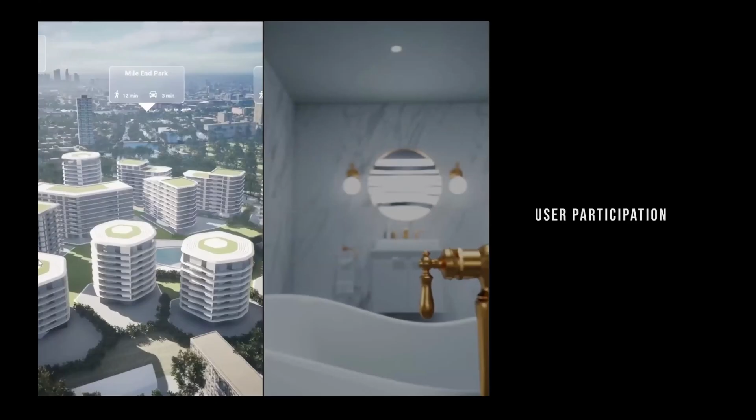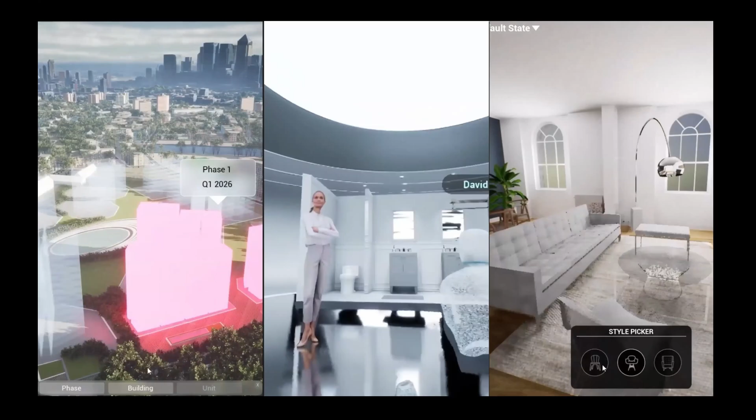At Aalter, we sit at the intersection between automated design solutions, leveraging a lot of our generative design tools, with enhanced experiences in the form of game engines and user participation through online configurators. For us, the way that we study and explore design options is very important, and the more data that we have, even if it's visual, being part of that process is important. So our mission is to deliver mass customized spaces that are more sustainable and inspiring through intelligent design technology.

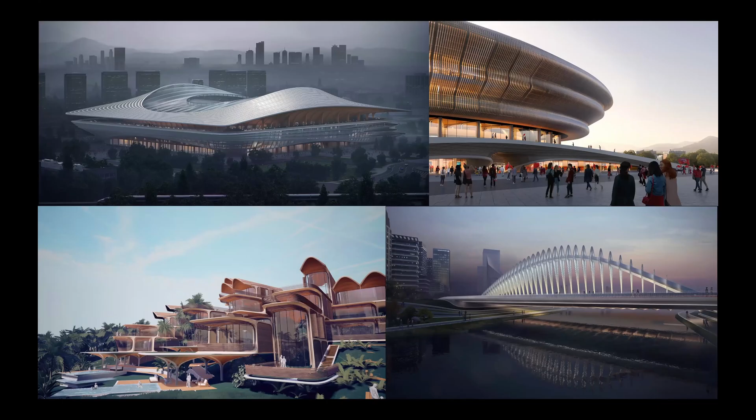It's also important to mention some of our past experience. Some of our team members were from ZHA, the computational design group. At the time we created a lot of custom software to win competitions at scale very fast, but also to rationalize complex geometry and create immersive, unique experiences in the form of configurators.

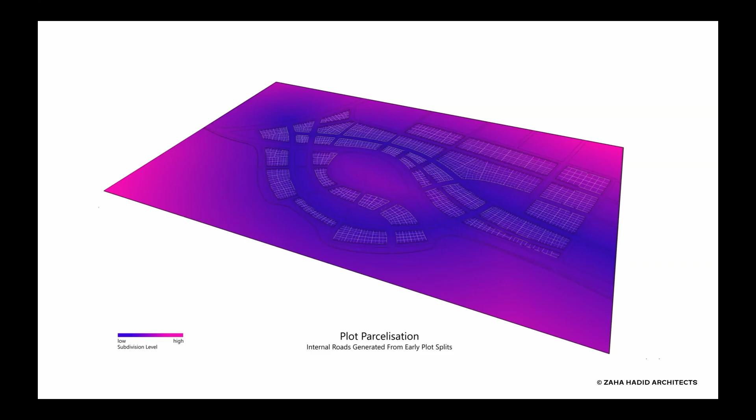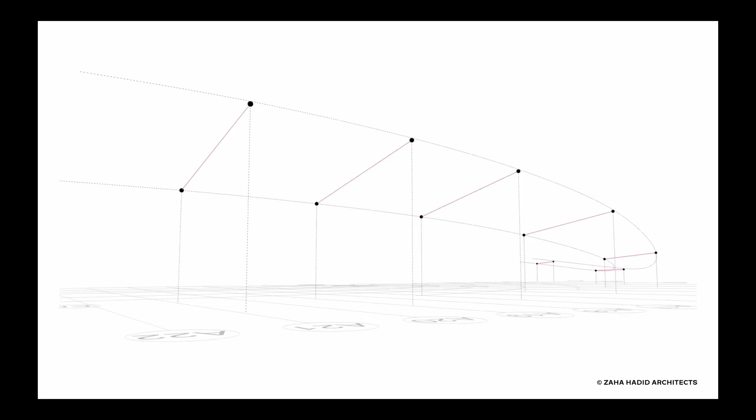We leveraged these tools across different scales: master planning tools with real-time analysis, rationalizing building typologies, and rationalizing complex systems, cladding and geometry, so we could build from the most standard parts and minimize the budget, while also creating configurators.

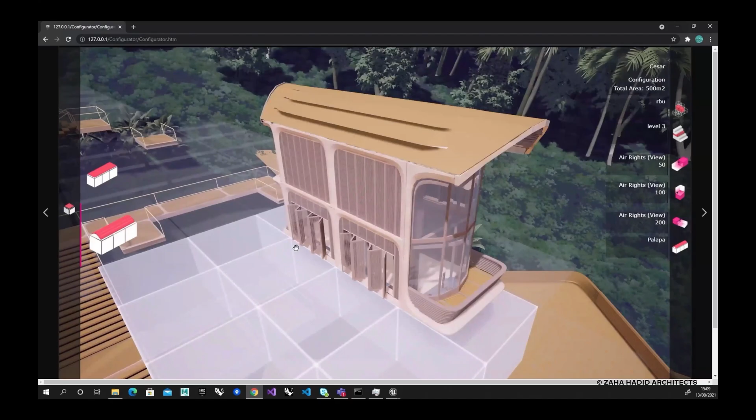This was one project from six years ago. It was quite innovative at the time, using modular systems and timber frames to deliver a unique experience for an island in Roatan. It's also important to mention some of the precedents about encoding architecture.

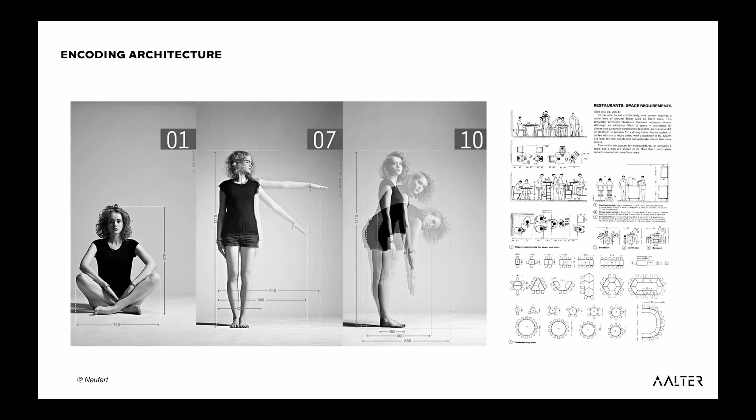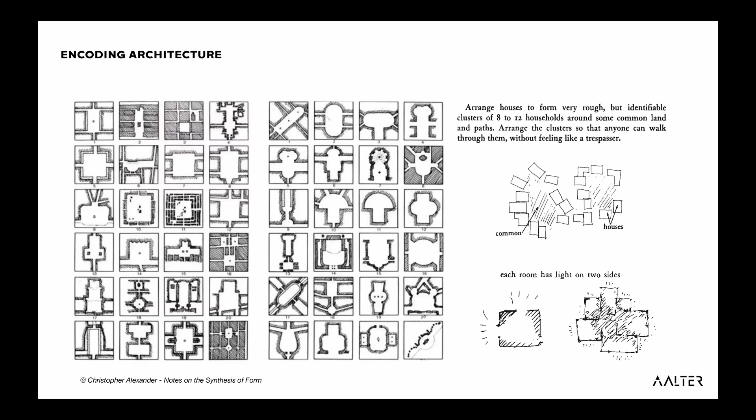We stand on the shoulders of giants here. The idea of encoding architecture is not new. Throughout history, architects have tried to encode rules based on ergonomics, room functions, and space layout, the relationships between spaces and between spaces and the exterior, setting rules and encoding and trying to serialize a building out of data, basically as graph relationships.

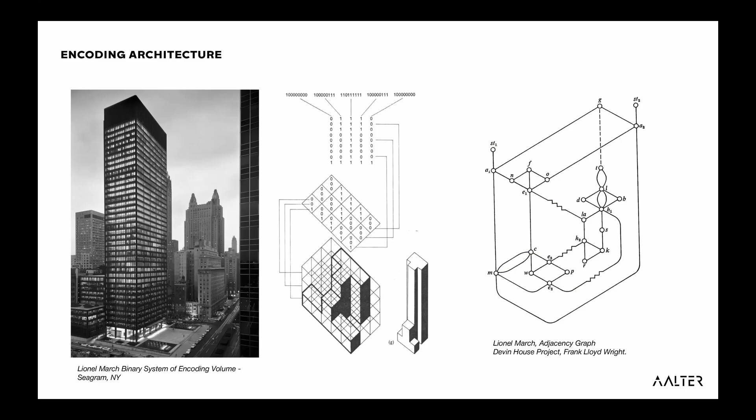This kind of set the stage for founding Aalter. Our technology is quite simple on its own. It's basically a system, a set of relationships similar to what would be an IFC or a BIM model nowadays, but with encoded intelligence of relationships between the parts.

Every room is aware of where it's connected, to which walls, to which window, which door, and these relationships extrapolate across multiple scales. We can understand how the circulation relates to each of these units, to understand escape distances, different typologies, and at the end of the day these become knowledge graphs, which LLMs are really good at querying and manipulating.

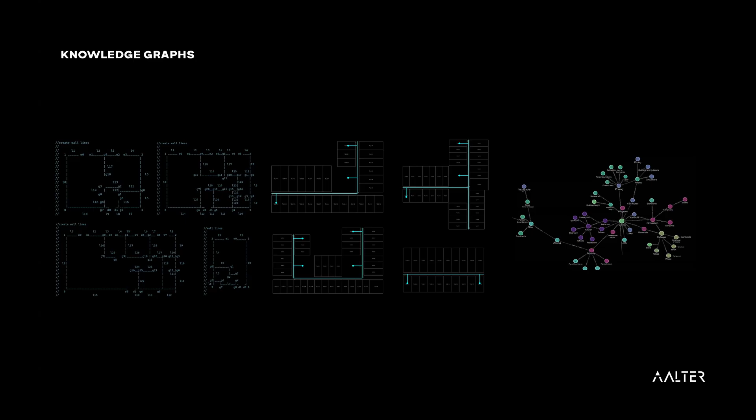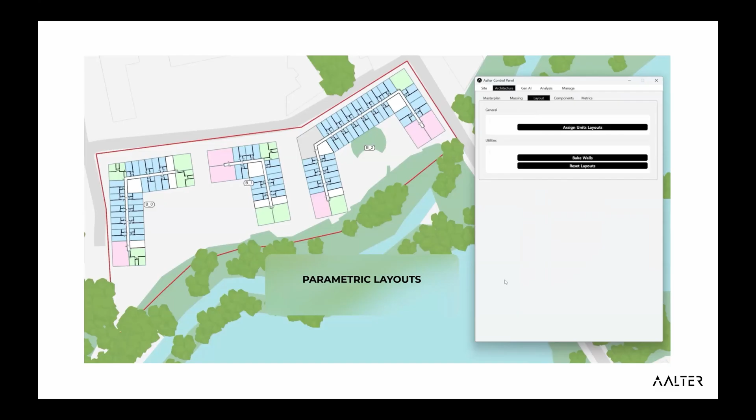Some of the tools we've developed connect to different APIs, like Google APIs, reconstructing context and allowing users to make parametric layouts that live as data in their databases, easy to then interpolate across different massing and complex shapes.

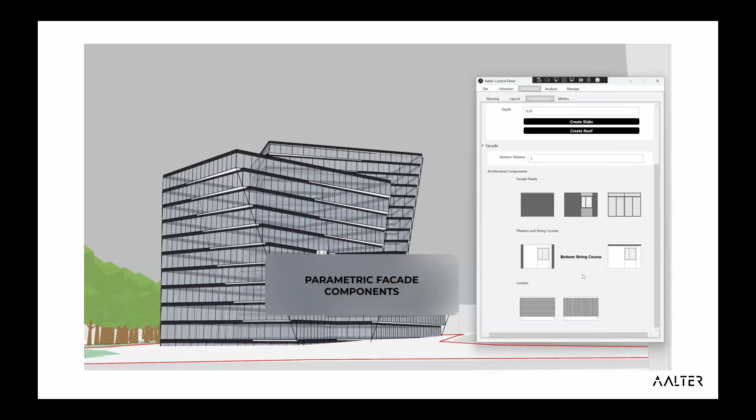This gives designers the possibility, with the tools they use, to create unique designs and explore design options with parametric systems, ranging from manipulating geometry to deploying components parametrically in an easy-to-use interface.

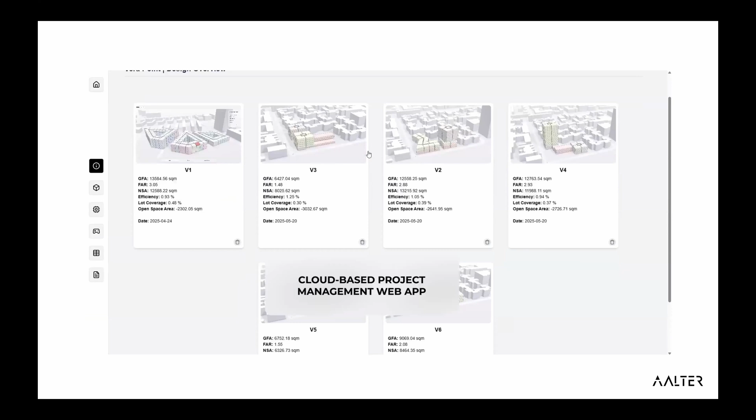So we deal with all the complexities of rationalizing and retopologizing some of these geometries, and then all of this leaves us data in a centralized web app, so we can explore every option with all the data that is exported automatically for the users. This is also very important, communicating with configurators.

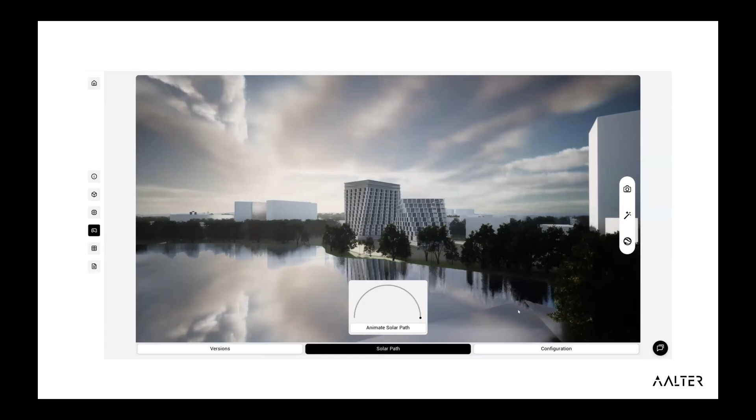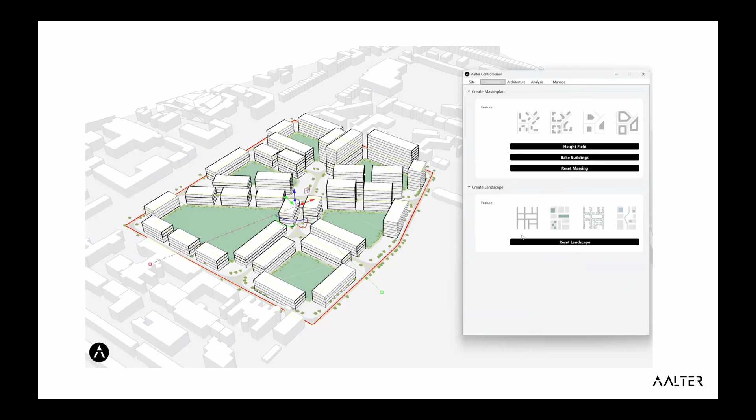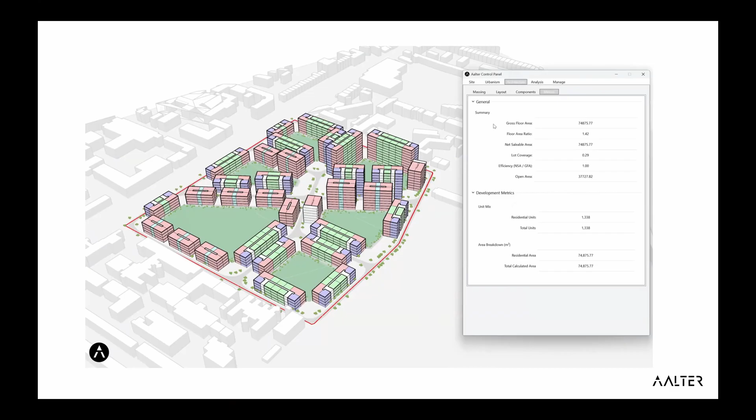So this kind of sets our workflows or pipelines that we've been working with and customizing. If you go more into different applications, different tools for master planning, it's giving designers the ability to stitch urban fabrics with input lines or input curvatures, and then be able to query between different building typologies based on zoning rules, field conditions, to make gradients, and work with the parameters of building shapes and sizes with real-time feedback out of the data they can extract.

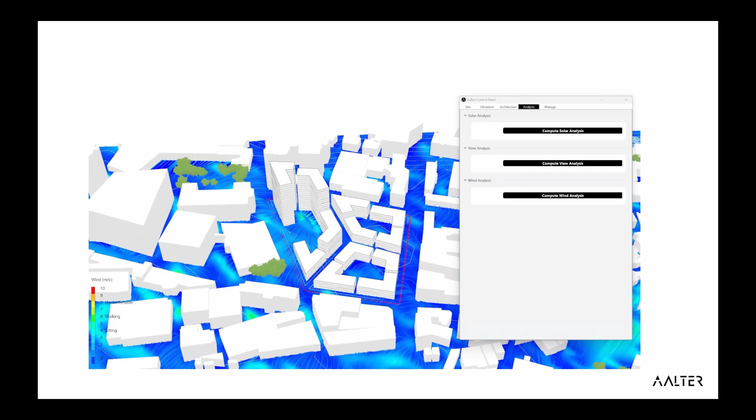So then the designer has more control, to say, okay, that part needs to have more shading, or if there's a specific view that sits as a layer on those heat maps.

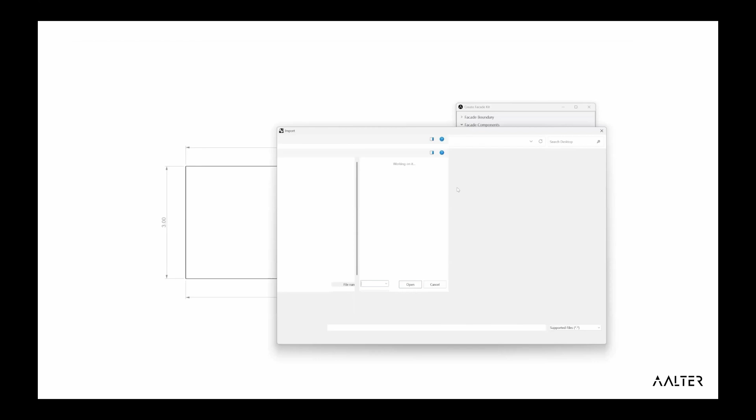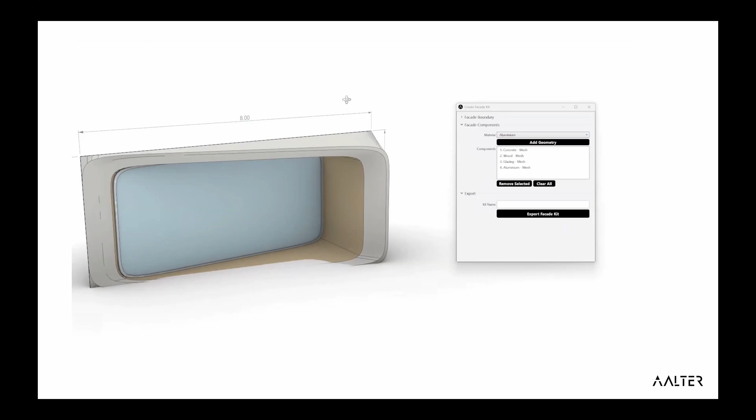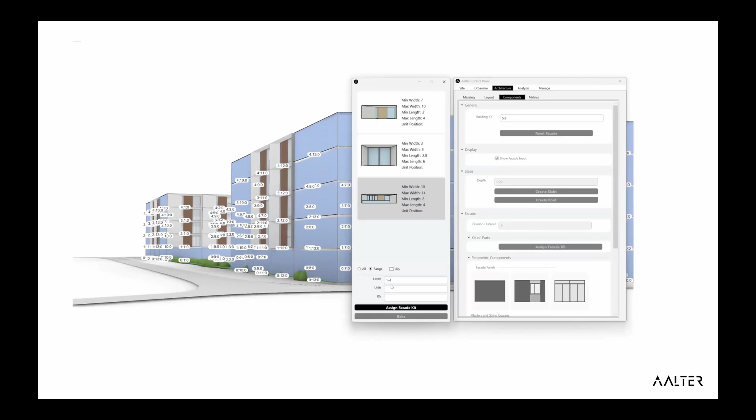The designers very easily have the ability to encode a kit of parts, and then give the user the option to say, okay, this kit can go between this and this range, it will be composed out of these materials, and then the system is able to allocate some of these components based on the massings and based on the user's understanding. So there's no manual work here, it's just about acknowledging, you give the rules to the system of how this part can be deployed, and the system does it with the control of the user.

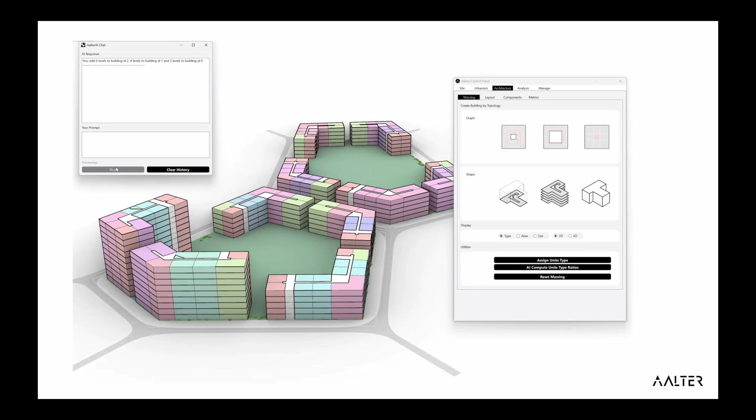Now we've also been starting to play out with agentic workflows, so it's communicating with LLMs. We are exposing some of these tools to the LLM, and the LLM can already understand how the building is composed and all the relationships.

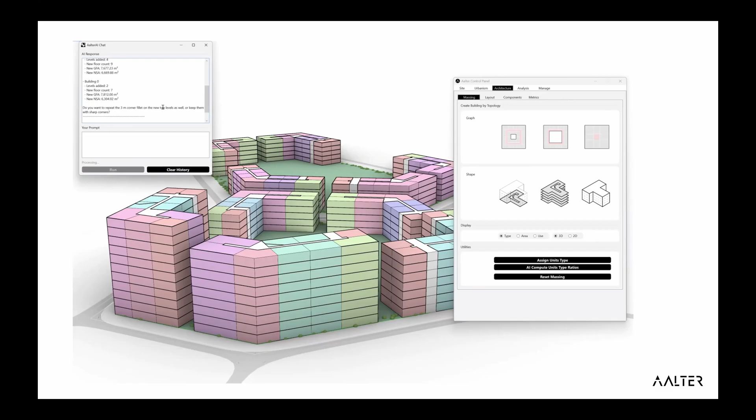So you can say, okay, increase the levels of these buildings, or rationalize it in this way, or just create some fillets around the corners of some of these buildings and deploy a part of this material. So you can be co-designing with these AI agents, the same way that you prompted ChatGPT. And this happens at a different scale.

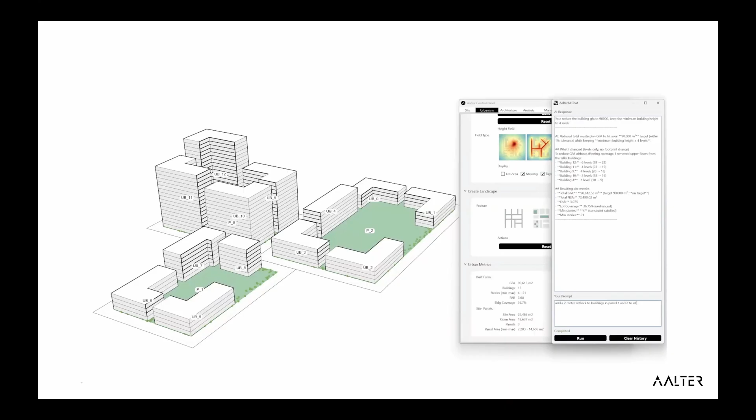One of the things we're using it a lot for in some of the projects we're developing is giving setback information, right? Like, okay, I want 20% of my units to be commercial use, and then it should be allocated on the ground floor. So the LLM is really good at making these connections, and we expose the tools to the LLM in order for it to be this co-designer.

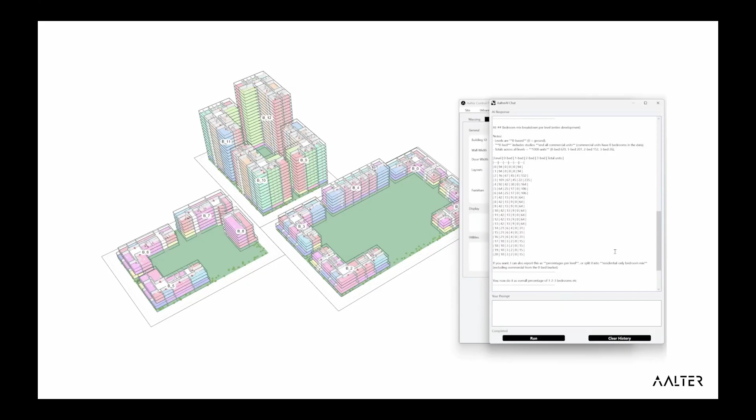Give us a unit mix of 1 bedroom, 2 bedrooms, or even querying, like, okay, can you give me a level-by-level clustering of the units? Then also allocate some automated layouts, and every layout will have information of, okay, where the bedroom might be, where the living room might be.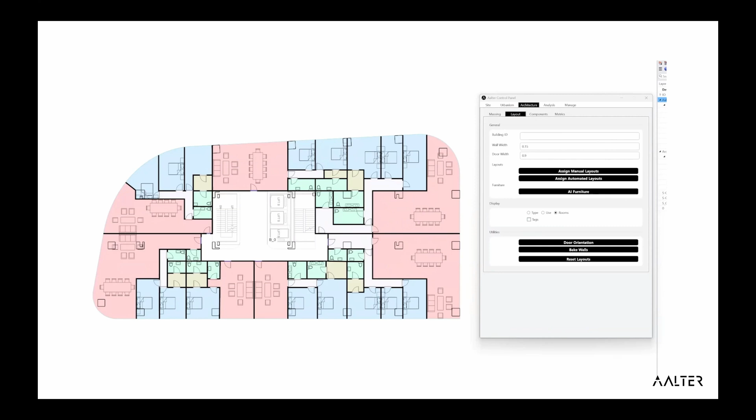And having these AI systems understand how to deploy some of these furniture blocks that the designer can then manipulate. So it won't necessarily give us the perfect layout immediately, but it might get us 80% there in a quick and automated way.

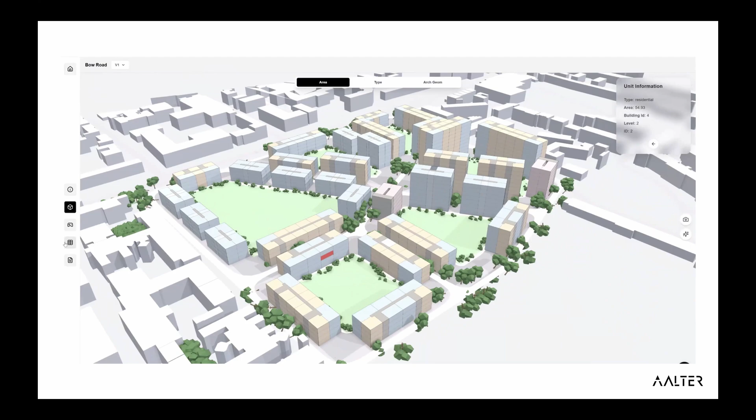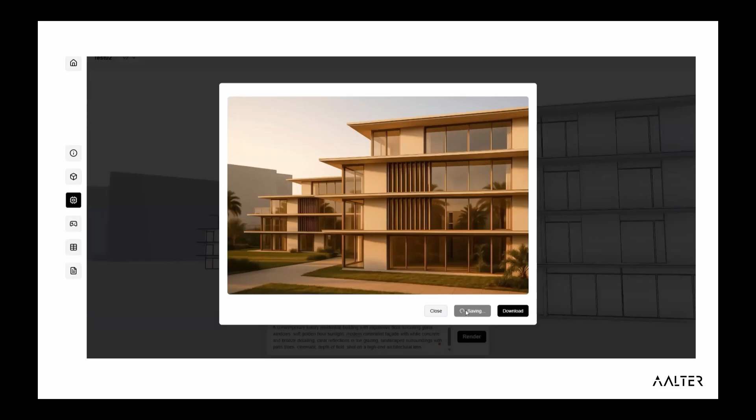Again, all of this is centralizing this database. So very easily we can start seeing, level by level, what's the efficiency of each building. It's broken down by buildings, by levels, and we understand all of the development metrics that the developer wants to understand early on. So every design implication has that connectivity.

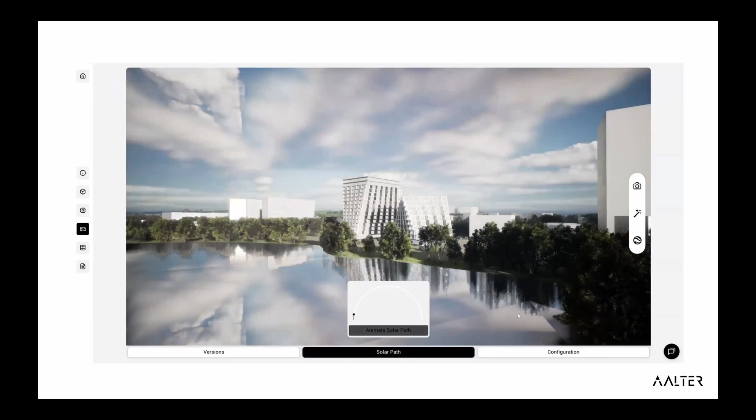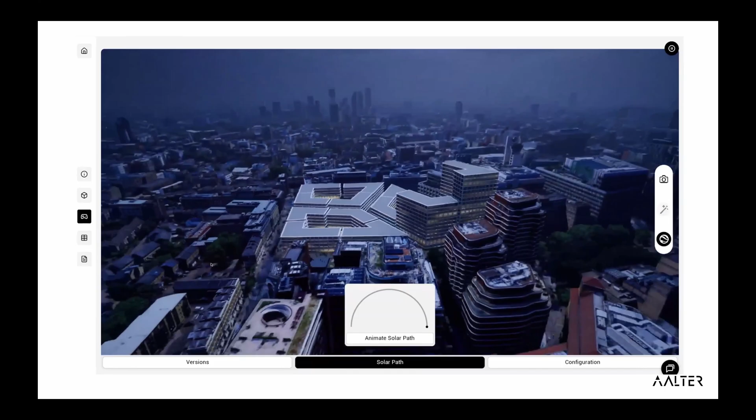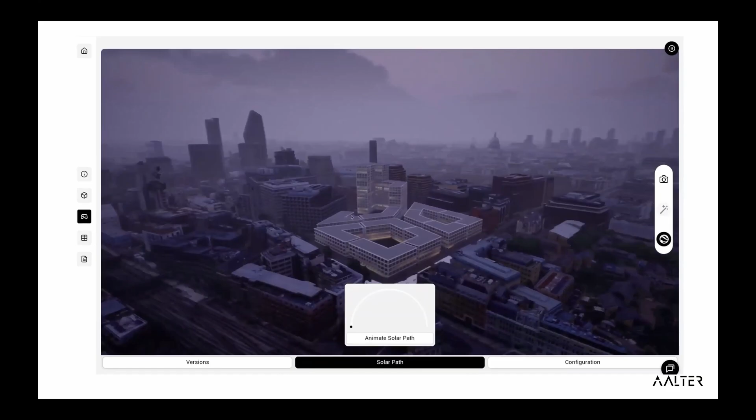So connecting also with generative AI models to extract visualization, and also connecting to these online configurators. Whenever we create these parametric parts, it sends it to the database, so we can query each version of a design, and the visual part, the real-time aspect of how it embeds within the context. If there's photogrammetry information out of Google, we can see how it fits within that environment.

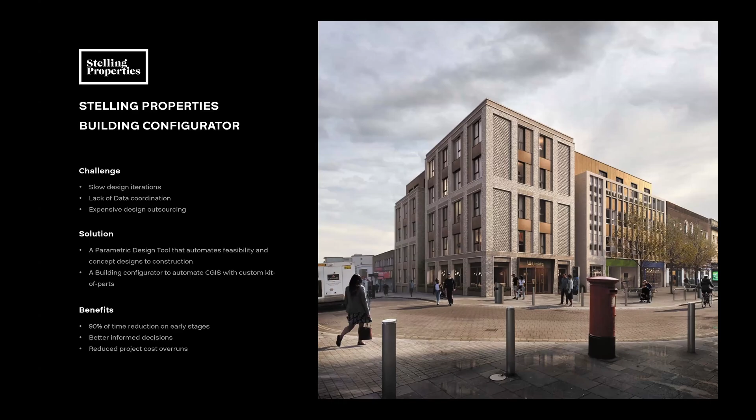Some of the use cases we've worked on, this is with our long-lasting collaborators, Stelling Properties, an amazing company that goes end to end to develop from land acquisition all the way to student housing. We've helped develop a system based on their set of rules and their building system, to encode that information and give their designer team a parametric system that can optimize some of these unit mixes based on their constraints.

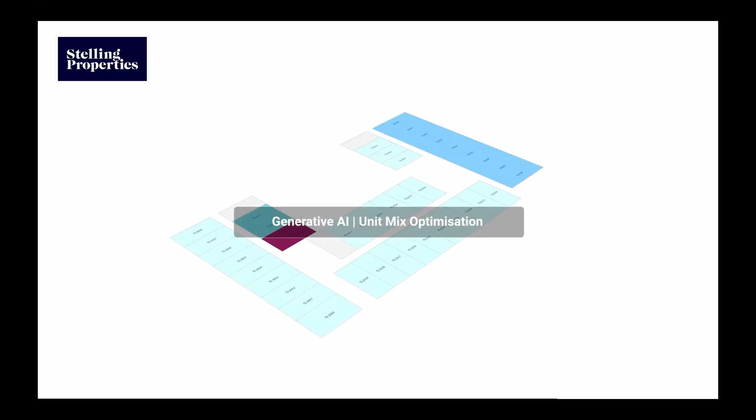So constraints are really important in these systems, right? It's all about what your system can put out. Doing clustering based on the hot roll steels and the connectivity between them, if there are setbacks, how many parts do we have connected already to their financial models and to their bill of materials.

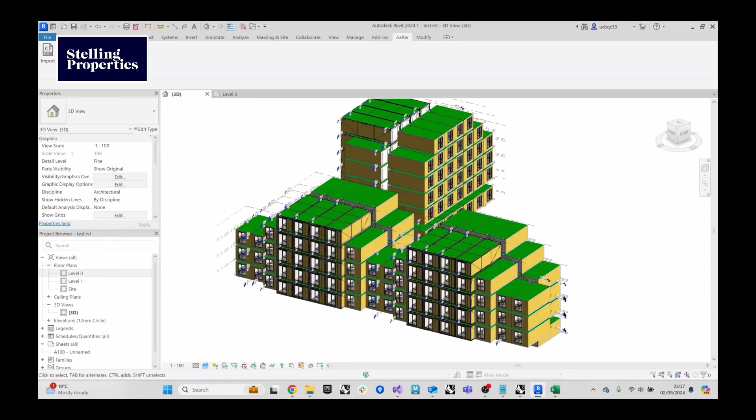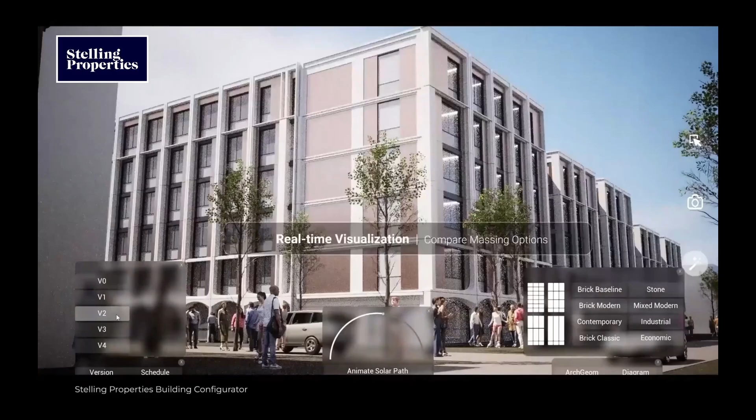So we can export all of those automatically. We can create Revit models automatically, or for them we'll also help curate a set of kit of parts, so we can explore every massing option and all the configurations, which are exponential, right?

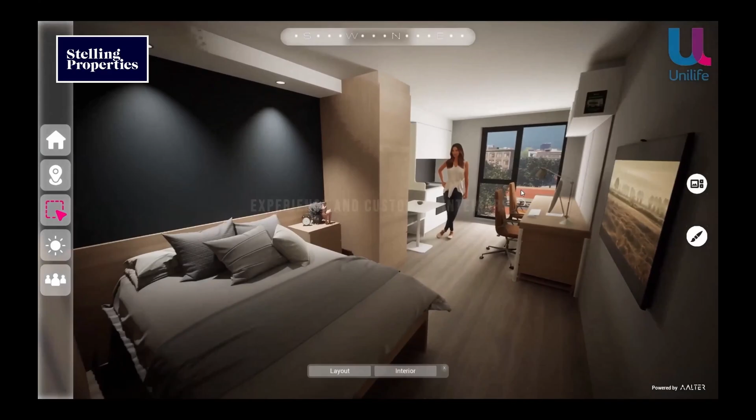Like if you have three massing, three kit of parts, it's nine possibilities to iterate. And this communicates also with a real-time experience for the students. So the idea is that we can also present this in a novel way for students that are overseas to book some of their properties.

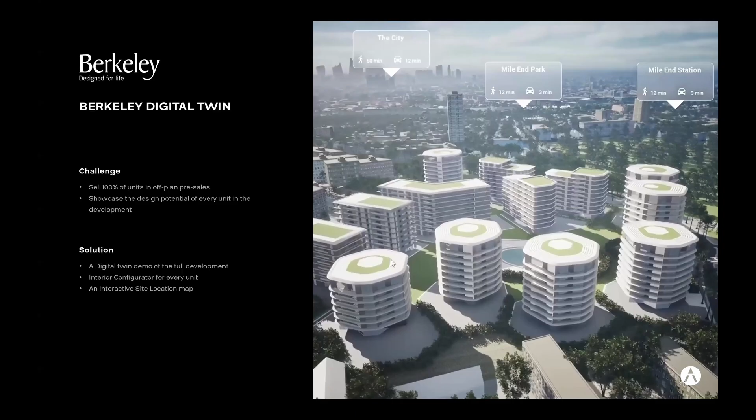I've also done some demos for Berkeley property, and this is something that we're doing more and more nowadays: these digital twins with embedded configurators.

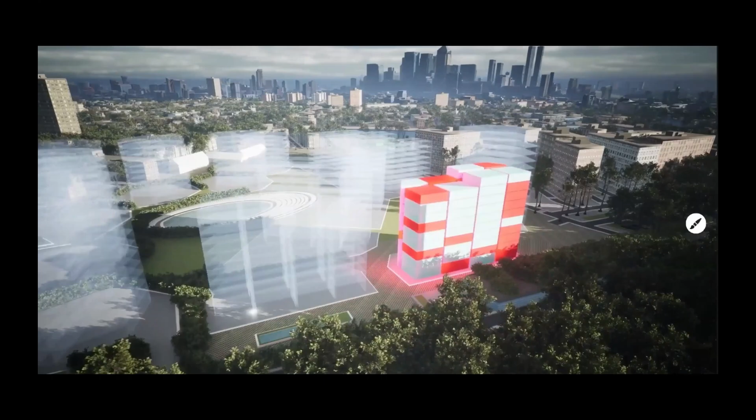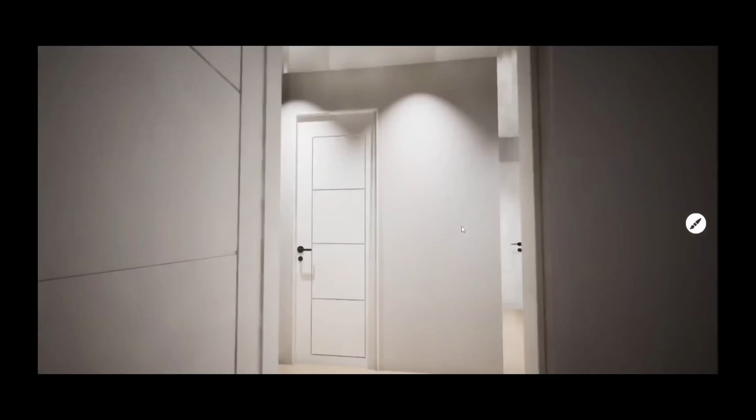So again, this is not just about the marketing side or the sales side. It's also about empowering users in a unique way to explore their future home, to configure it, the same way that people would buy a car and be able to customize some parts. It won't change the chassis of the car the same way it won't change the MEPs, but it makes every property unique to the specifications of the user.

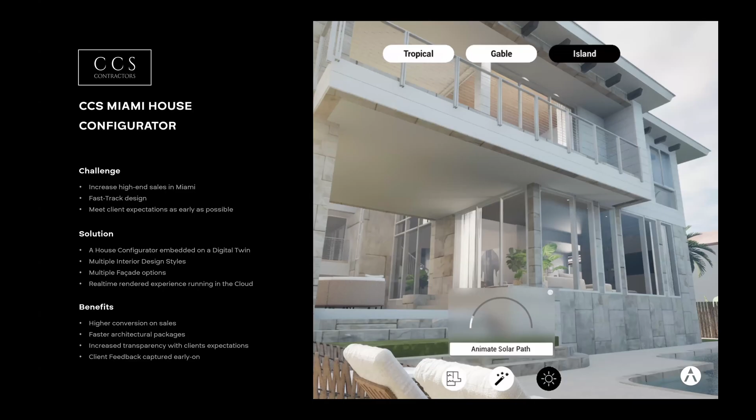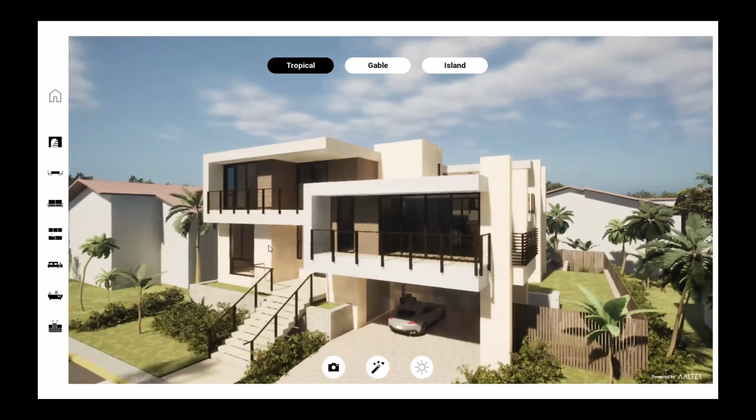And then, well, this is basically the last demo, also a house configurator in Miami. And I think this links very well with Molly's work. I'm also teaching at UCL with Molly's partner, Gilles. We have a research unit as well there.

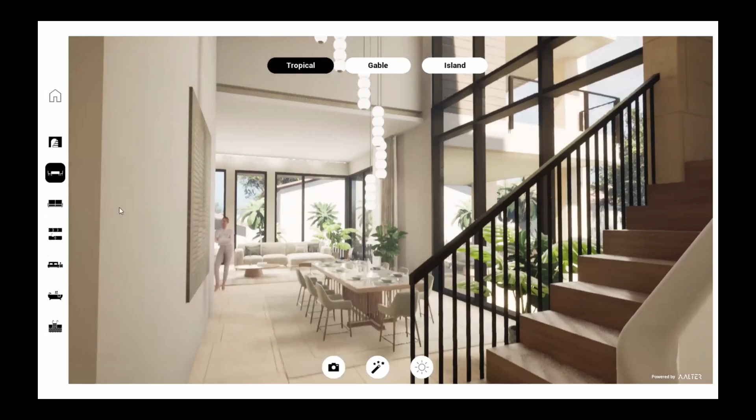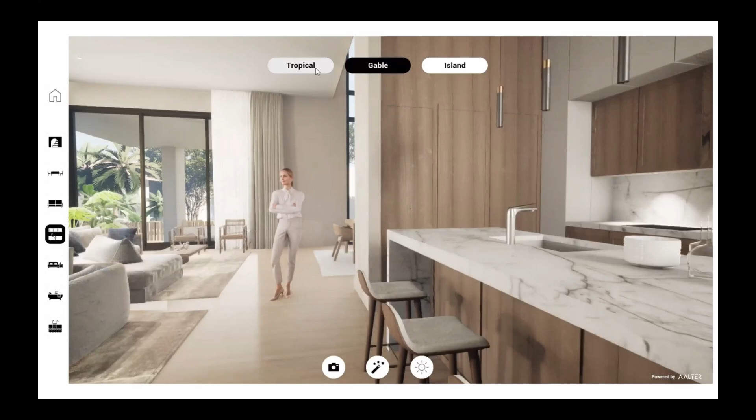And then, this idea that we can have curated kit of parts, or templates of houses, customizable to each unit, but without changing that much, like the layout — it's about presenting it in a different way. So the developer, or in this case also the designers, can already extract data from the final user that's going to live here, and that takes us further in the design process.

And if we can connect these to a fabrication system, I think Molly will do a great job now showcasing what they're doing. It would be very interesting to continue the conversation in the following panel. So that's a little bit of where we are at Alter.